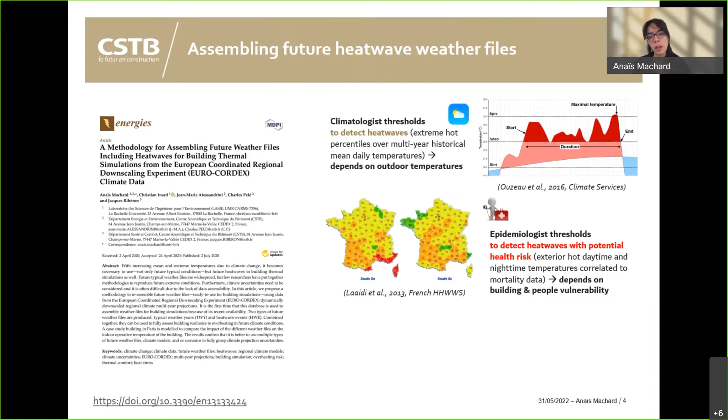So in France, we have other heat wave detection methods. For instance, epidemiologists are detecting heat waves based on past mortality data, to detect heat waves based on health risk. And this method I have also used in my PhD, but since mortality data is very local, we decided not to use the epidemiologist threshold for the Annex, but only the climatologist threshold. But at least for France, I have compared the two methods, and at least half of the heat waves that we detect with the climatologist threshold have a potential health risk in France. So we don't know for the other cities, but maybe similar data can be found.

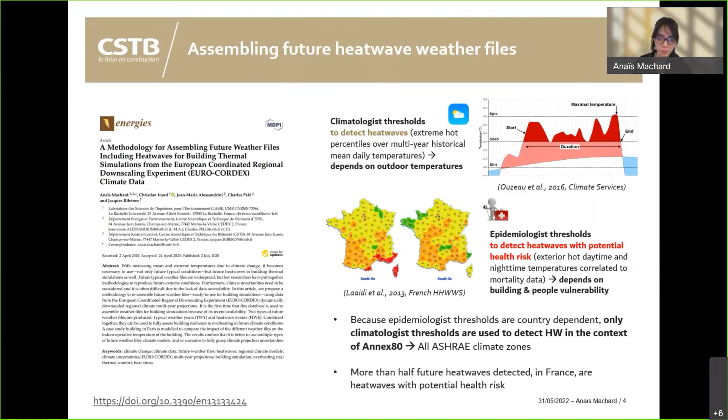And as Agnès mentioned, in typical meteorological year data that we found in different data generators, we don't find such extreme temperatures, which are more representative of what is most likely going to happen. But this is only for one socioeconomic scenario and one climate model, so we cannot generalize the results, but with the methodology, we still find many, many heat waves.

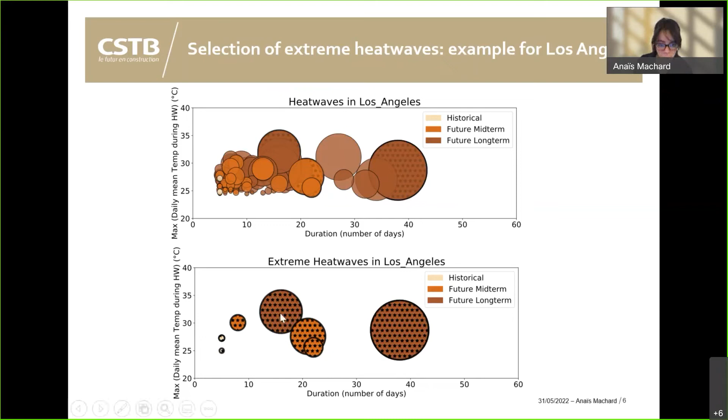So for instance, the largest bubble on the right is the longest heat wave of all heat waves detected for the future long-term period. And the second dark brown bubble is the heat wave of the long-term period with the highest intensity and also the highest severity, which is a combination of duration and intensity defined by the bubble size of the heat wave.

And finally, some more data on these extreme heat waves that we have decided to use for the thermal resilience assessment. So we have selected the most extreme heat waves. On the graph on the top, you can see the intensity of the most intense heat wave that we have selected for each city and for each period. And what we can see is that the intensity of the most intense heat wave increases between the different time periods, which was expected, of course, but we can have some general numbers.

We can see an increase of up to 5 degrees in daily mean temperatures on average in the cities. In some cities, for instance Sao Paulo, the increase between the end of the century and now is higher than 5 degrees. In some cities, we also observe that the increase is higher between the end of the century and the mid-century, and in other cities the increase is quite linear, so it depends on the cities.

And when we analyze the heat wave duration, which is the figure on the bottom, we can observe very, very long heat waves projected to occur, especially in the 4 hottest climate zones. We could already see this with the mean average temperature that Agnès was presenting before. The longest heat waves are more than 2 months long by the end of the century for the hottest cities, and for most cities at least 1 month long. By the mid-century, the heat wave duration goes from 3 weeks to almost a month, which is a big change to consider in building design.

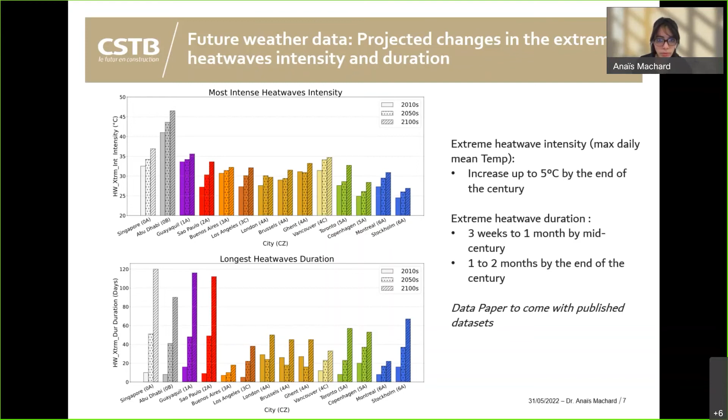So now regarding the practical applications of these future heat wave weather files during the building designs, here I will present part of my work that I conducted during my PhD. So this was a contribution to a methodology of building design.

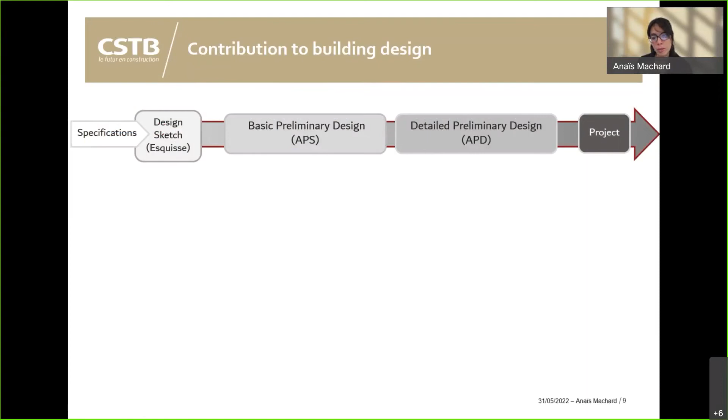So you can see here on the graph how building design is currently made in France. So it's quite a linear way from the sketch of the building until the design of the building until the project. And then the idea was to propose to add a new objective criterion into the building design. So we design buildings to maximize energy sobriety, to have reduced energy needs, and to maximize summer thermal comfort.

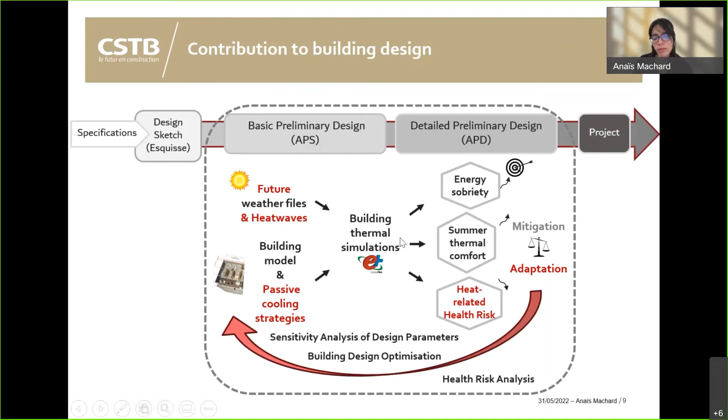But we also wanted to add a performance objective criterion, which was to reduce the heat-related health risk that can occur during heat waves. Which is why we have developed future heat wave weather files to be able to assess this potential health risk. And then we conducted many building thermal simulations with the use of statistical methods such as sensitivity analysis and building design optimization to optimize different passive cooling strategies. And then we analyzed these optimized building designs during the future heat wave to assess the potential health risk.

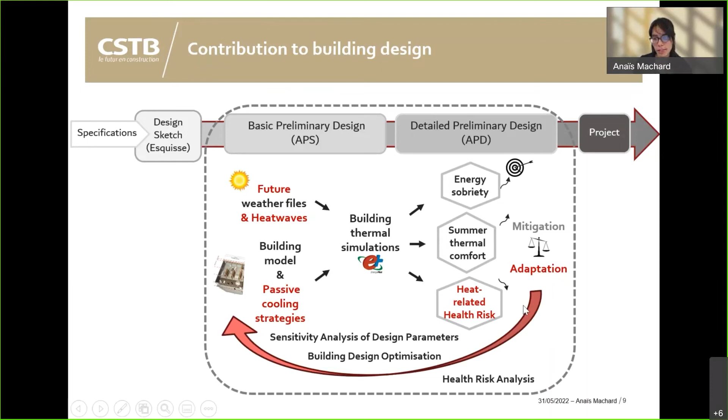So regarding the different adaptation strategies that were analyzed. So first we have used a building case study, which was a residential case study building compliant with the latest French thermal regulation, which has an advantageous design for summer thermal comfort, let's say, because it allows cross ventilation, has large windows which can create high airflow rates through the windows when they are open.

And also the building has a buffer zone. It has a veranda oriented on the south. So we assume that the exterior windows of the veranda are open in the summer, which actually creates a buffer space for the solar radiation, which arrives in the veranda, but then the direct solar radiation doesn't enter this conditioned zone in the middle where people are living. So actually this was the beneficial design for this building.

And then we have conducted optimization methods between two contradictory objectives, which are to minimize the heating needs and to minimize the summer thermal discomfort. And we have done this for two cities in France. So Paris, the capital, and Carpentras, which is one of the hottest cities in the south.

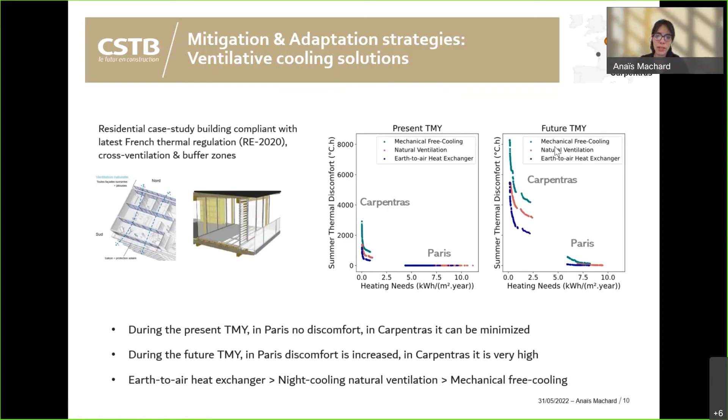And in Carpentras, we can also see that in some situations of the Pareto front, when the heating needs are the highest, even though they're very low, we can minimize this summer thermal discomfort in the present, but in the future, we can observe a very high increase for all the solutions.

For the thermal mass, for instance, we have high thermal mass that will lead to low heating needs, and vice versa. But then for summer thermal comfort, we can have any of these solutions that will lead to 0. However, in the future, what we can see is that to minimize the summer thermal discomfort, we need to have high thermal mass in the building designs and to have low glazing percentage in the building designs.

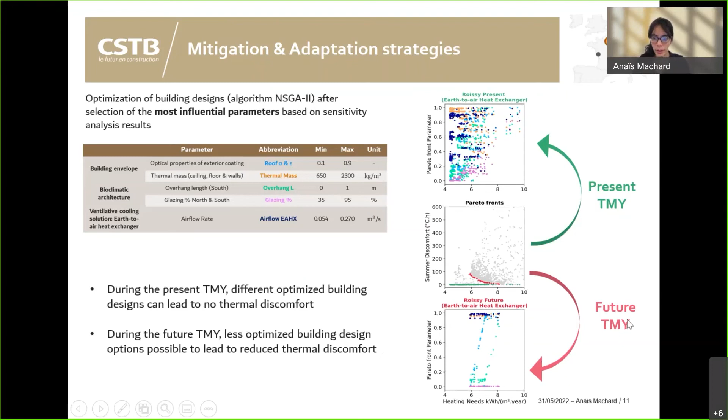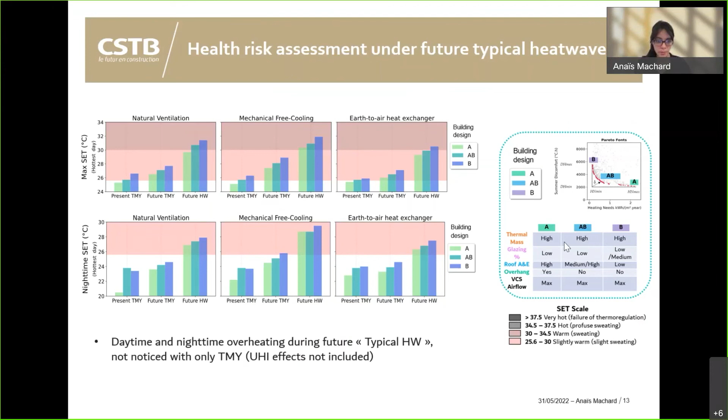Another indicator that we wanted to analyze was the number of consecutive days in which we have potential health risk during a heat wave, because usual thermal comfort indicators sometimes use an aggregation of discomfort over a specific period. But for heat stress, we know that it is the consecutive exposure to indoor heat that will have an effect on the physiological body.

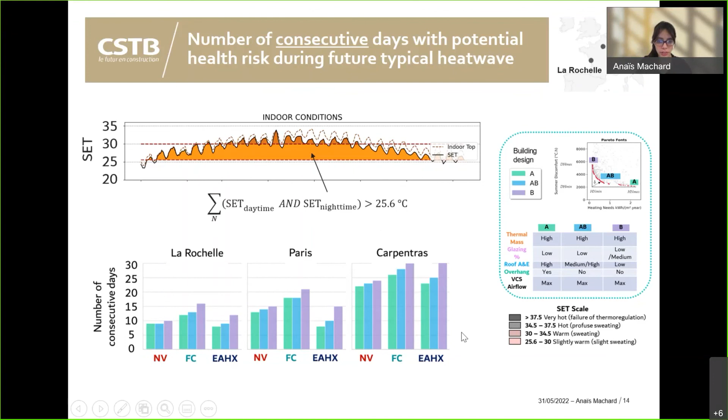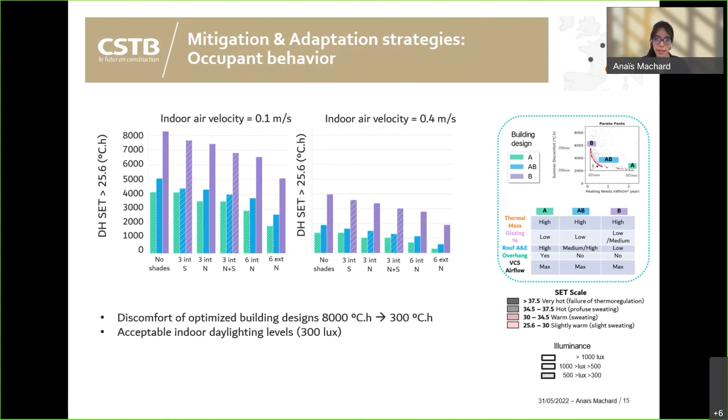Finally, as perspectives, this is just to say a word on the work currently ongoing in Annex 80 on building thermal simulations that will probably be presented in future webinars. A framework of different stages of resilience was defined, with the building being an object with its own vulnerability, and then different stages of resilience that are consecutive after one or several shocks. And within Annex 80, we want to analyze different shocks, such as different extreme heat waves, either the most intense heat wave or the longest heat wave, and then also a combination of different shocks with some power outage for buildings that have active resilient cooling strategies, to assess the resilience of these active cooling strategies.

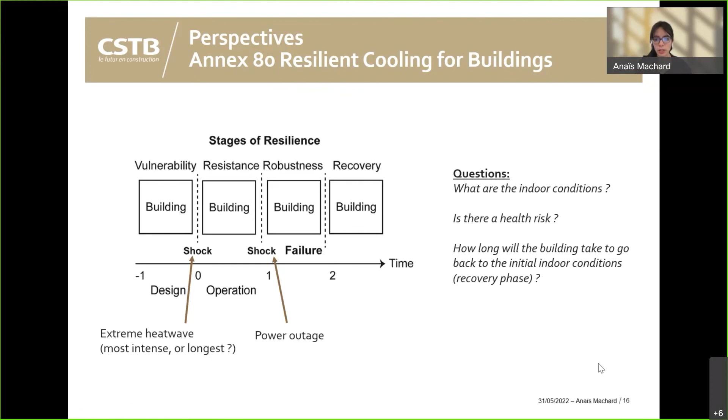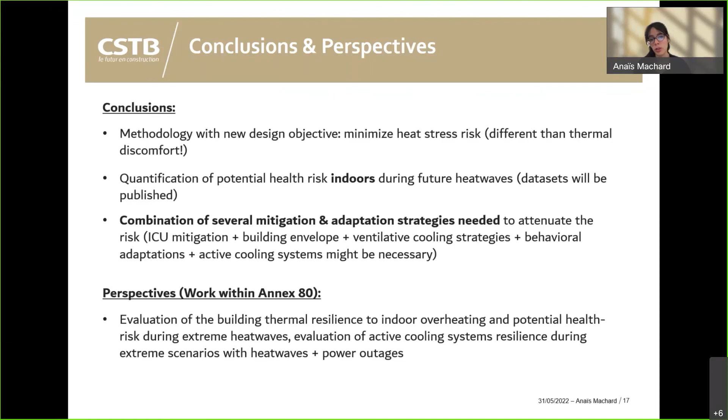And just to quickly conclude, the methodology I presented was with this new objective to integrate into building design, to think of using future heat wave weather files to analyze and minimize this heat stress risk, and to really think about it during the building design and not after problems occur in buildings. And I also want to emphasize that a combination of different mitigation and adaptation strategies will be needed to attenuate the climate change risk and this heat exposure risk. And it must be a combination of mitigation strategies at the urban scale, of the building envelope, of the different ventilative cooling systems, or also active cooling systems and occupant behavior.